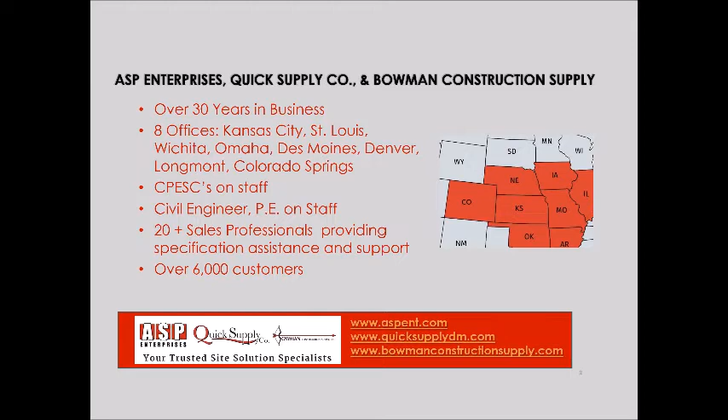We have over 8,000 customers now. I need to update my slide. But for those of you that only know us from phone and emails and meeting us at organizations and conferences, if you haven't had the chance to visit us, some of our locations have very impressive showrooms.

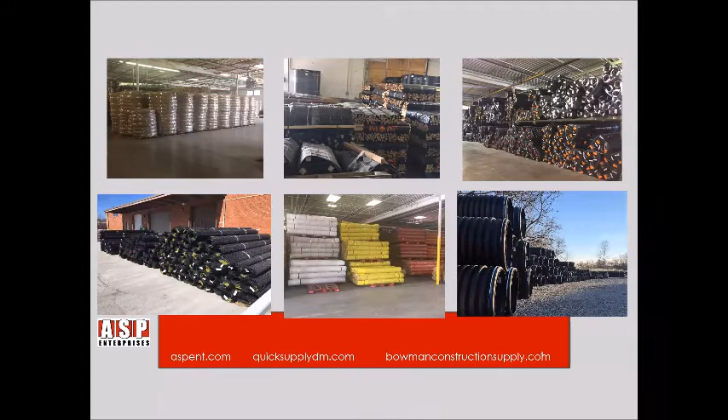Some have very impressive displays outdoors. All of our locations have warehouses and trucks and drivers, and we have the ability to quickly load up whatever you order from us and get it to your construction site. And we are still active in all of our branches and all of our locations. And some of our warehouses would blow you away with how full they are of products and materials, so you're not having to wait and have delays.

And we also have some very nice stock yards at some of our facilities where we can supply a variety of different materials, not just the erosion and sediment control materials I talked about, but also drainage products, vegetated solutions, engineered products, hardscapes. And we're blessed to be partnered with a lot of the top manufacturers in the world.

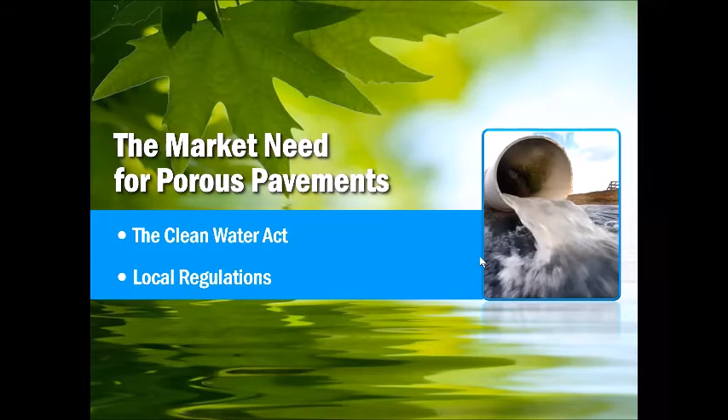So the natural first question is, why are porous pavements needed, and how are they going to be different than a standard pavement surface that we would typically see? So porous pavements are a class of solutions that address in a cost-effective way regulations that may need to be met.

After 40 plus years, the Clean Water Act continues to create the need for stormwater management for both quantity and quality. And most states have developed non-point pollution regulations with specific targets. Local regulations may require even more stringent standards if a project is located near a protected wetland or water source. And porous pavements are going to be one great way to meet all of these criteria while still performing in a structurally meaningful and long-lasting way.

And another reason that you may choose porous pavements is because you want to. Poor soil conditions are becoming more common as better suited sites are more scarce and land is at a premium. High stormwater management value is going to be the desire to make the best use of valuable, high-cost land and reduce the need for stormwater ponds by increasing the porosity of your pavements.

Porous pavement systems handle the water at the point of impact, percolating the water where it falls, and avoiding the need for additional conveyance pipes or structures that might otherwise be necessary. And sustainable solutions are popular with the public nowadays because of the high percentage of recycled materials, reduced landfilling of those abundant recycled materials, and the ability to achieve green energy credits.

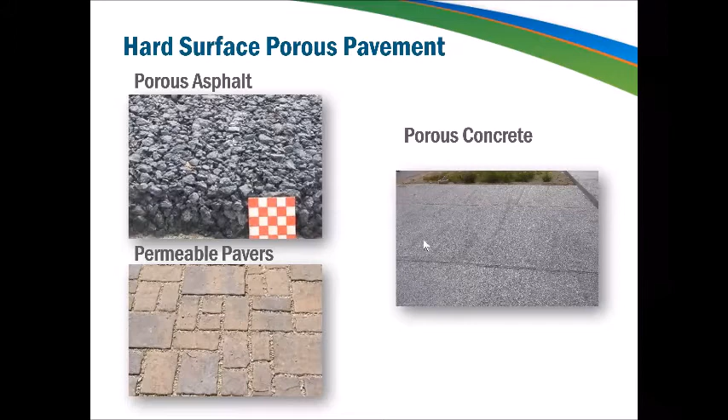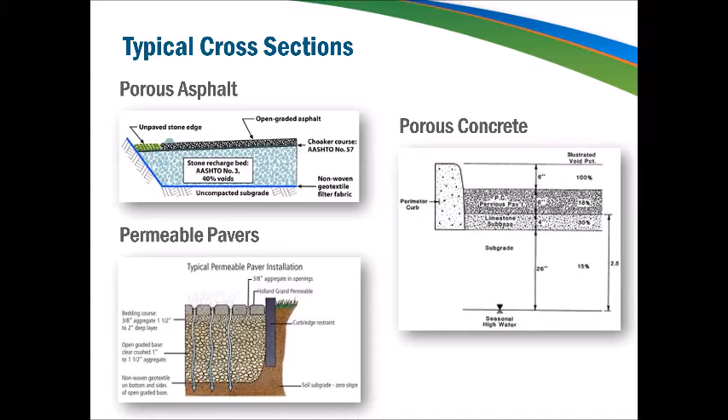So the biggest difference between the standard and a porous version of these types of surfaces is going to be the cross section. All three of these methods have deeper cross sections and require a choker or a bedding course between your pavement layer and the open graded base layer underneath. So this is going to be an extra installation step that requires additional time and adds costs, as well as needing extra materials to create.

However, there are some significant drawbacks in addition to that cross-section depth to using these more traditional porous methods. Cost is going to be the biggest factor, both during installation, because you need specialized materials to create these type of pavements, and you need specialty contractors who know how to properly install them, and higher cost over the lifetime of the system because you're going to need a lot more maintenance.

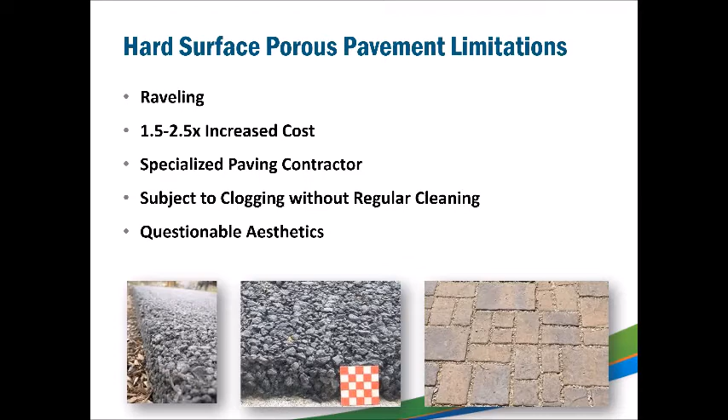Regular deep cleaning is going to be required to reduce clogged areas, as is resurfacing or replacement of lost material due to raveling. And that occurs because there's weak bonds within these materials, which is what makes them porous, but also what makes them fall apart. And in general, pervious concrete and asphalt surfaces tend to look unfinished, leading to some questionable aesthetics.

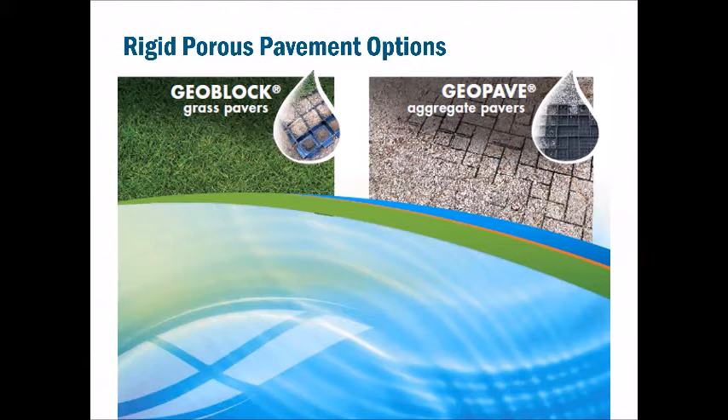So here at Presto Geosystems, we offer two different types of porous pavement systems, a flexible and a rigid system. And instead of adaptations of existing pavements, our solutions are designed from the ground up to function as porous pavements. So we're going to start with discussing the rigid porous pavements.

One option is going to be to create a vegetated porous pavement with a grass surface. It's meant for occasional or infrequent traffic, and it delivers the aesthetic of a green space. Local vegetation can be used to create a seamless look with your existing plants. And a unique blend of topsoil and clean aggregate is used as the base layer, allowing for root growth while providing necessary stabilizing strength.

Our other option for rigid systems is going to be an aggregate surface porous pavement. This system can handle higher traffic frequency, including daily use. And a confined aggregate can perform as an on-site stormwater detention basin, reducing or maybe even eliminating the need for conveyance pipes or other stormwater infrastructure. The structural strength and loading capabilities of these systems are going to depend on what your subgrade material is, which one of the infill types you choose, and whether or not you have a base layer.

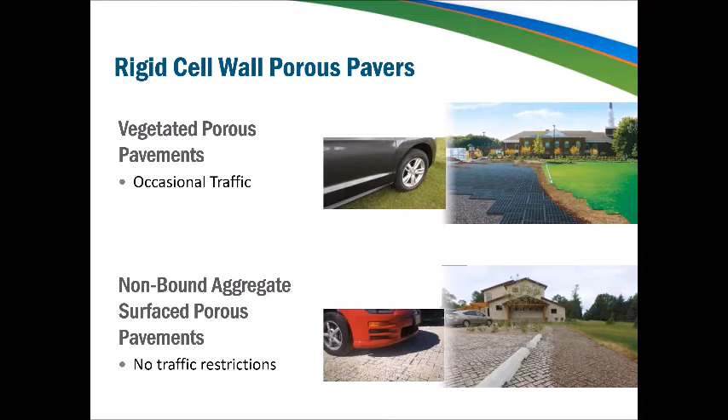So these are some of the important characteristics that are inherent to the GeoBlock vegetated system. The GeoBlock is a rigid porous paver unit, meaning that the panels are not meant to bend or twist. And this rigid nature means that a thinner cross-section is going to be possible and is a stronger system compared to systems that are made of geotextiles, which are also on the market. We're going to talk a little bit more about those as we go along.

And so this is going to be quite different than other porous pavement units that are available, which are considered flexible systems like the Geo Web and have significantly reduced loading capabilities. The attributes that have the biggest impact on the load distribution are the paver's wall strength and stiffness and a strong tabular connection.

An important aspect of the GeoBlock vegetated units is their large amount of open space in the bottom of each cell, which allows for full root penetration, so the grass is thick and uniform. And that mix of aggregate and topsoil we call engineered base, and it provides an optimal growing medium for that vegetation.

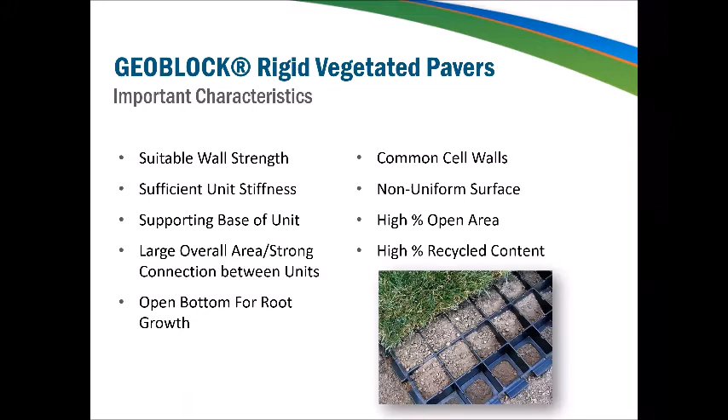So the GeoPave aggregate surface units are going to be really similar to the GeoBlock units we just saw, with the same rigid paver characteristics, but with specific features needed for the performance of an aggregate infill. And the main difference I want to highlight is going to be the monolithic mesh bottom. So rather than the large open space that we just saw in GeoBlock, this is a mesh on the bottom of the GeoPave units. So it's molded in place on the underside of the unit, and it helps keep the stone infill from migrating underneath the system.

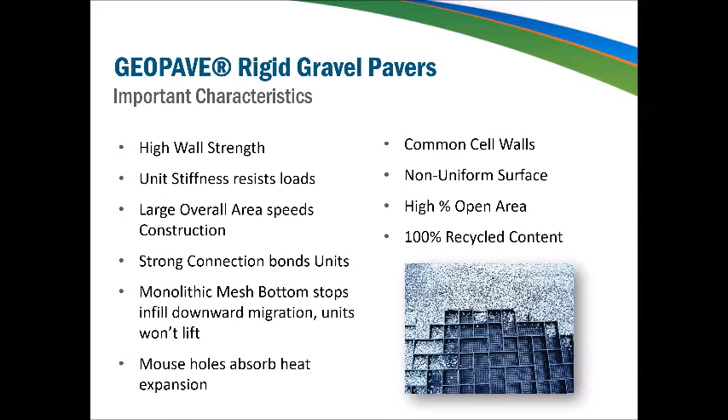And it also is part of the integrated nature and assists in the overall rigidity of the paver unit. And this bottom spreads the load similar to a snowshoe effect, so that the wheels aren't going to create any ruts as they go over. And the GeoPave units are locked together with a strong connection device, and so they can create a fully integrated, contiguous pavement that's highly resistant to traffic stresses. And this system isn't going to lift up over time, which is common with geotextile-based porous pavements. It's going to stay in place so you don't have to do a lot of maintenance repair.

And so that was our rigid products. Now we're going to move on to our flexible product. We call it Geo Web. This is a geocell, which is a term you may have heard before. It's similar to a geogrid, but it has a defined depth, so it's a 3D product. And flexible porous pavements can support the same loads as the rigid pavers that we just saw, but typically they're going to require a slightly deeper cross section to carry those heavier loads. But the flexible nature is beneficial if you know that your area has potential for settlement, such as across wetland areas.

So the Geo Web system is that 3D cellular confinement system, meaning that the Geo Web panels have individual cells that are filled with a material that ultimately makes up the final surface of your road or parking area. And by confining this infill material, the system distributes the loads and prevents ruts. And those cells also keep that material in place so that it's not going to wash away during a stormwater event. And the surface of the porous pavement is going to be stable no matter what infill is chosen. And it's going to need very little maintenance.

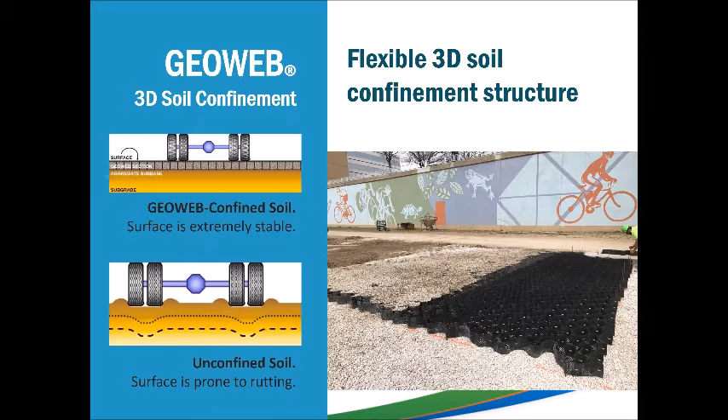So in this case, with the flexible porous pavement systems, you're driving on your infill material rather than the plastic paver units that you would with the rigid system. So that's going to be the biggest difference.

So the Geo Web system has two main attributes that we need to highlight. And the first is going to be that cell or container size. It comes in 3 diameters, small, medium, and large, and a couple different cell heights ranging from 3 all the way up to 12 inches. And knowing the project dimensions is going to help you determine which one is going to be right for you.

And because it's a flexible system, the seam where all of those connecting points are is going to be very important to the function of how the Geo Web system works. The stronger the seam, the better the performance of the Geo Web or any geocell system. And a strong seam allows for heavier infill material and better lifetime performance. And the strength of the panel material also is going to be critical to the performance of a geocell system like the Geo Web.

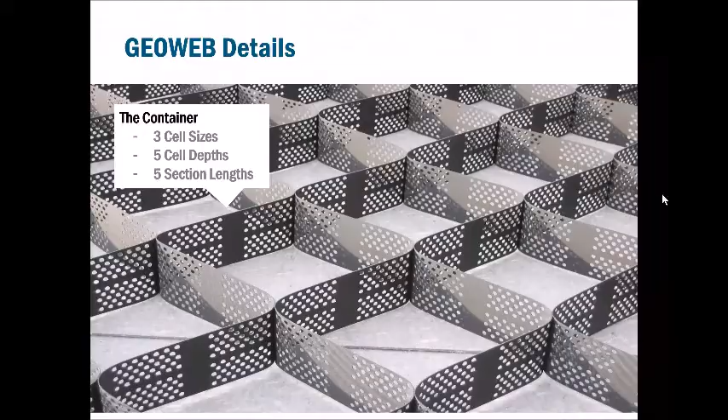And an important benefit to using this type of system is that you can use low quality aggregate and even salvaged materials on site to use as your infill. And using salvaged aggregate can save a significant amount of money on material and hauling costs if you don't need to truck in expensive engineered stone.

And when you eliminate the fines within the material, that provides confinement and aids in compaction of these cohesionless soils. Without fines, you can significantly improve the drainage and let water flow freely through the system, preventing pore pressure buildup and global failure. So that's how it acts as that porous pavement system.

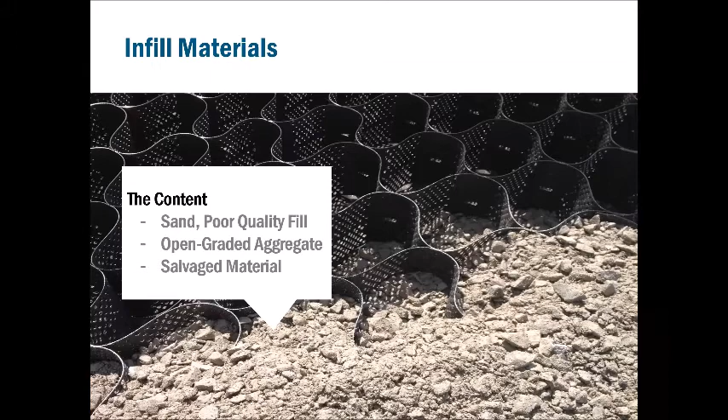And it's easy to see how a rigid porous pavement system would work to support your loads. A little more difficult to see how a flexible system would work. So the question is, does it actually work? And the answer is yes.

You can see the comparison within a truck yard here, with the GEOWEB system on the left and without it on the right. This is with a single pass of one of those fully loaded semi-trucks. Fully loaded, it's going to have this huge difference. Imagine on the right how often you're going to need to replace that system to keep it running in shape.

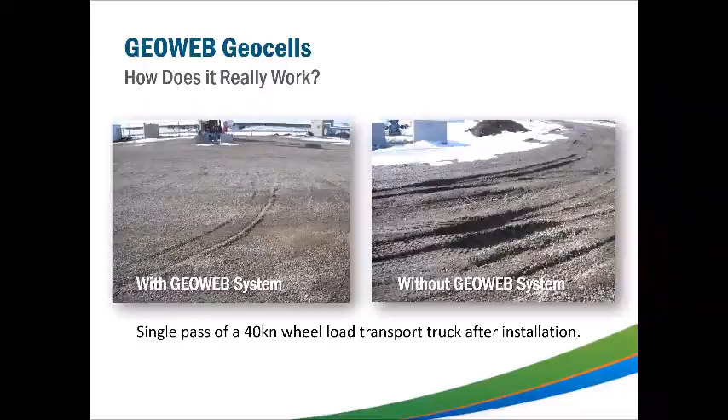So with that, we've now talked about the characteristics that make both rigid and flexible porous pavement units special. And with that in mind, we're now going to talk about the benefits of choosing a porous pavement over a hard surface that is impervious.

So all of our products offer significant storage of stormwater in the cross-section as it moves into the groundwater system. And because the water infiltrates right through the system, you're going to have minimal sheet runoff at the surface, reducing flooding potential on and around your pavement.

Both the Geo Web and Geo Pave systems have a high percentage of open area and utilize a highly permeable, open graded aggregate infill, so the stormwater infiltrates exceptionally fast. And then the loose and protected topsoil infill in the Geo Block units allows water to infiltrate faster than a typical vegetated area on site.

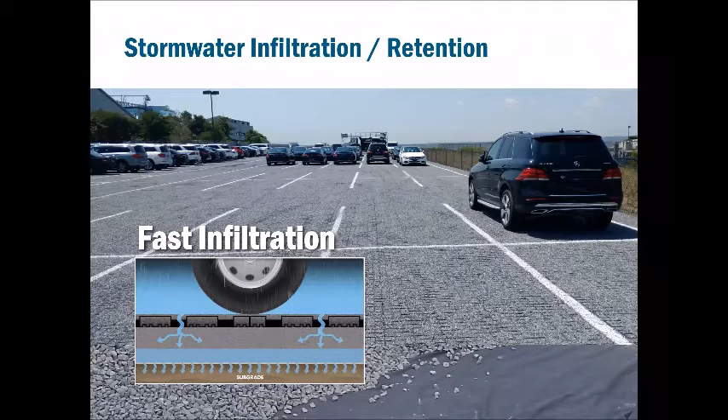Other paver systems on the market are geotextile fabric based, and so they're going to percolate much more slowly, which is going to defeat the purpose of a porous pavement. Pavements that allow water to flow through the surface and into your open graded base course can reduce the amount of requirements for stormwater storage at the surface.

And the rate of infiltration of all of our porous pavement materials is also going to depend on what your subgrade material is. A clay is going to infiltrate much slower than a sand. So that's going to determine if you do need additional stormwater storage at the surface, or if you can have all of that storage happen within your porous pavement system.

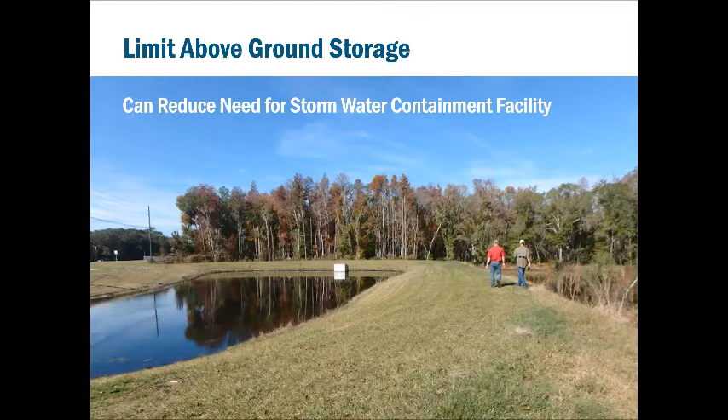So if your native subgrade has that poor infiltration, if it's a really wet clay, or maybe you are required to direct your water to a central location, collection pipes can be installed in your open graded base course. And the pipes should have perforations to collect that water and then be sloped to maintain velocity. And all of that can happen without affecting your surface grade.

Providing that wrapped perforated pipe is typically not recommended unless your base is clean. Otherwise, it can become clogged. It's usually better to provide a geotextile filter around the perimeter of a drainage trench or a French drain so that the pipe is encapsulated within stone.

The main thought is you do want to prevent that clogging, and the method that you use will be based on what you have on site, what type of stone is available. But you can have a nice flat parking lot and still collect your stormwater with ease.

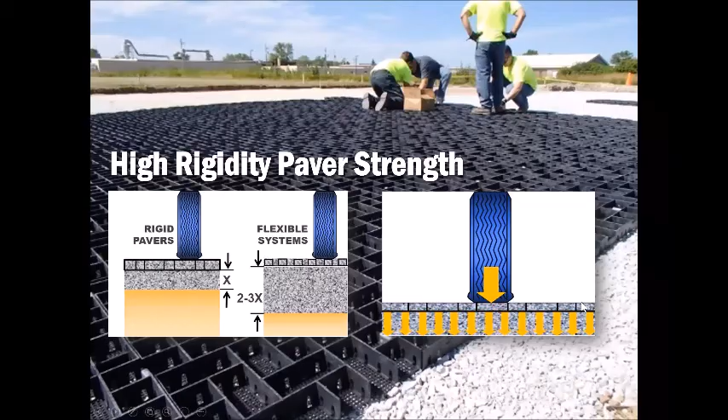So our Geo Block and Geo Pave rigid pavers do have a really high crush strength because of their rigid and shared wall connections. Pavers with enough strength allow for less base requirements to support the load, reducing your potential cross-section by up to 67%. And the surface of your porous pavement resists concentrated rutting as the load is dispersed across the rigid paver units. So there's no wheel ruts and no sunken drive lanes.

And so you're not going to get any of those normal failure points that you would see with a standard pavement. And the units are strong enough to drive on when they're unfilled, which makes installation both faster and easier. So if a thin cross section is what you need on your site, one of these products is going to be the way you want to go.

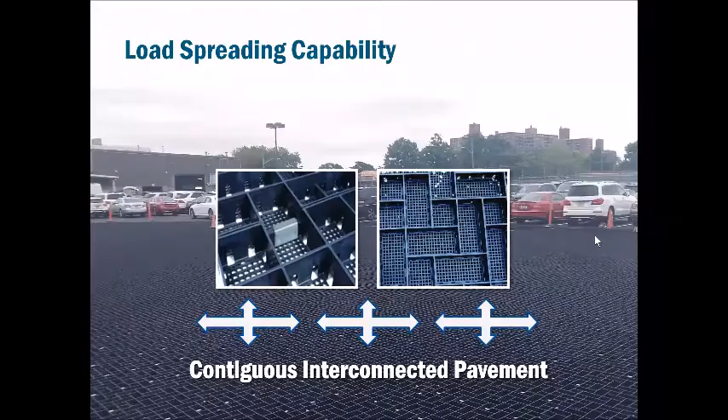Both the rigid and flexible porous pavement options can cover a large area as a single contiguous system. The integrated system supports each unit with strong connectors, common cell walls, and everything else to create that contiguous pavement with a high distribution of vehicle loads. It allows for higher vehicle weights to drive on the system with a thinner cross section, and allows the system to be installed over poor subgrades, even very poor subgrades like wetlands.

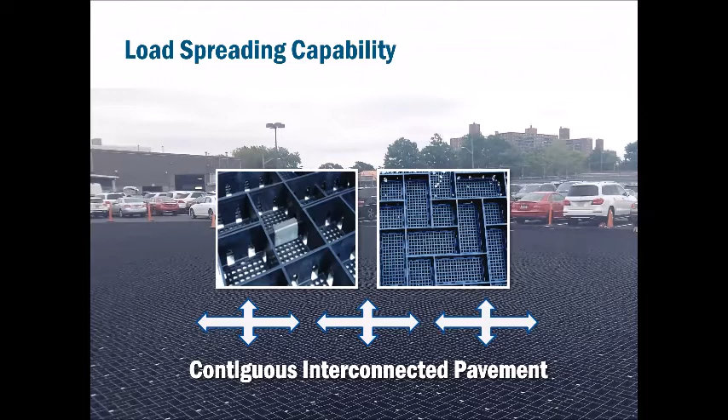The geotextile fabric-based systems don't share any of those cell walls or connector points, so they're going to warp under vehicle loads, and they just don't have that same load spreading capability.

Speaking of load spreading, one of the functions of a porous pavement system is to reduce the stress that's transferred to the soil by vehicle traffic.

A great application of these products is to use them as tree root protection. By laying these systems over tree roots, as close to the tree trunks as possible, you reduce the stress that puts pressure on those roots and could potentially damage them, which would result in killing that tree. So if you have trees that need to stay in place, all of our systems are a great way to get your vehicle access roads, like a driveway, which uses any of those systems to create a stone or vegetated surface while keeping that existing vegetation in place.

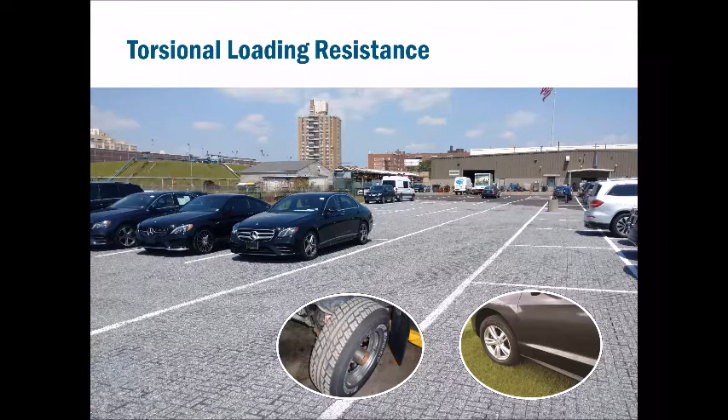With the rigid system, that shared wall system and strong connectors creates a framework that's highly resistant to movement or breakage from vehicle turning stresses, so your torsional loads. Both the GeoPave and GeoBlock systems aren't just for straight drive lanes, they're full service vehicle areas, allowing for starting, stopping, turning, and everything in between. The panels aren't going to become damaged from any normal vehicle activities, even the heaviest trucks or semis.

Both the rigid and flexible paver units align well with existing asphalt or traditional pavements. Here you can see a car dealership parking lot addition. The paver units come in rectangles, but they can all be field cut to handle curves, existing structures such as manholes, or other obstacles that are common on site.

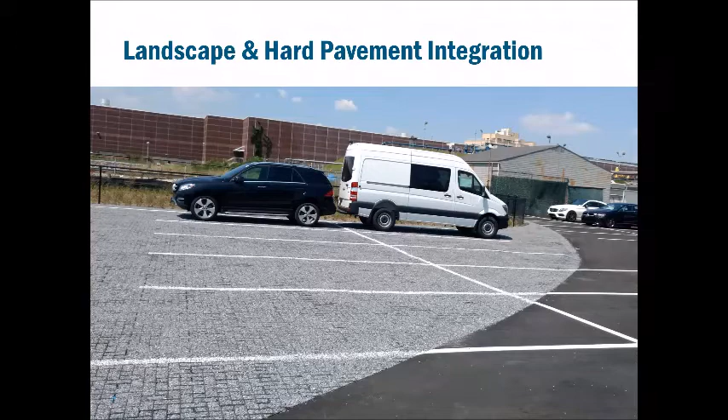The GeoPave and GeoBlock units, or the Geo Web panels, can work in concert with a hard surface pavement, and they're so porous they can actually handle the sheet runoff from adjacent impervious parking areas. This is a great way to add additional parking spaces while still meeting stormwater requirements on site, with no need to create additional stormwater infrastructure such as drainage swales or ponds.

The cell walls of the GeoPave unit are meant to be visible, so they were designed with the herringbone pattern, similar to a paver stone aesthetic. Additionally, the stone color can be varied to create a sense of separation, useful for walkways, parking lots, and road shoulders.

The GeoBlock units allow for full vegetation growth with a natural look, so you're not going to see the cell walls, just a nice green lawn. The Geo Web panels are actually going to be completely covered by any stone that you use, so an aggregate surface is all that you're going to see. Whatever look you're going for on site, you can achieve it with one of these products without that unfinished look that's really common with porous concrete or asphalt.

Reducing a site's overall environmental impact can help you meet green infrastructure, low impact development, or green building goals for building in protected or densely populated areas. It can also help you meet stormwater requirements that limit the amount of hard surface in your landscape plans, which is becoming an increasingly common requirement in cities and townships. This is something we've experienced all across the US and are absolutely willing to help you achieve for your specific projects.

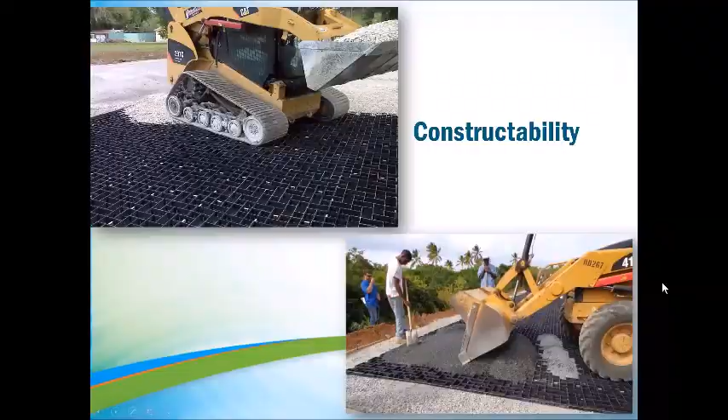There are a number of constructability benefits as well. All of the products are lightweight enough for a single person to carry at least one or two at a time, and the connectors are fast to install.

One of the great things about using the rigid system is that the infill placement is fast, as both tracked and rubber tired equipment can drive on the panels when they're unfilled. You can see that here in the photos. Paving crews and specialized paving equipment aren't necessary, and oftentimes landscaper crews are all that's going to be required for installation. So you can save on equipment and labor costs and get these systems in the ground quickly without waiting for cure times or sequenced construction limits.

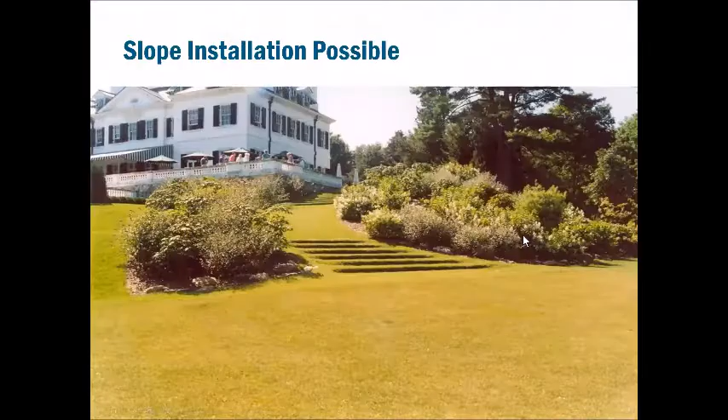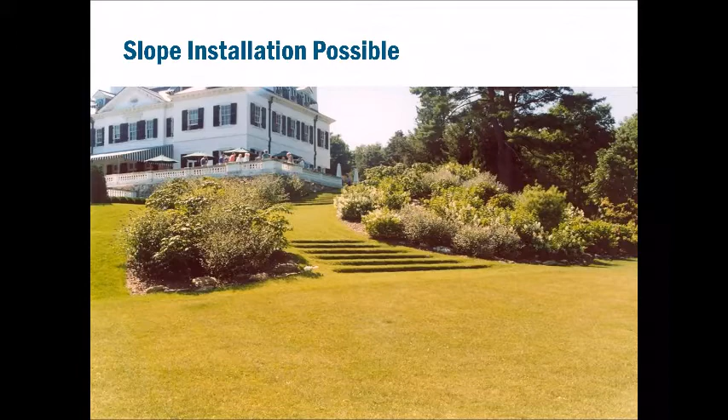And the rigid GeoPave and GeoBlock units work best on a mild grade. Because they're flat paver units, the slope does need to be quite gradual without any sharp breaks between those grade changes. But the GeoWeb flexible system is going to be a great option if you know that you have a slope. The GeoWeb panels can be placed on slopes as steep as 30 degrees and still allow for vehicle traffic.

The GeoWeb systems can also handle dips or hills more easily than the rigid system. So if you want to minimize your excavation and grading activities, that's okay. The flexible GeoWeb system is going to work great. So the locked in place system requires virtually no maintenance. Place it and forget it. Owners and maintenance crews are definitely going to appreciate this feature.

We have bright yellow delineators that are available for parking lines or other markings, so you can make the space work for your needs. And other common extras, such as parking stops, are also easy to install in any of our porous pavement units.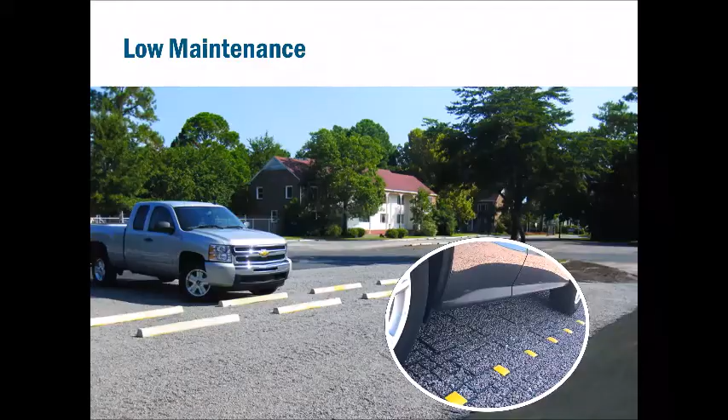So Presto Geosystems has a free, easy-to-use tool that can help you determine the right porous pavement system for your specific project and site conditions. A cross-section of the system is created based on your inputs and system requirements. And it's a way to determine exactly how deep the cross-section needs to be to retain a certain amount of stormwater storage. The tool is available on our website, prestogeo.com, and our engineering team, including myself, is always happy to help give advice or expertise on designing one of these systems.

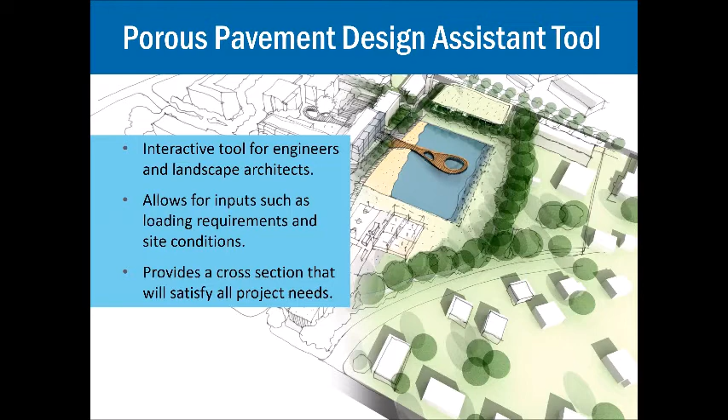So this is a quick look at what the Design Assistant tool provides you. It's a pretty basic cross-section, but it can be pretty helpful during the beginning of the design process. And if needed, additional calculations and CAD details, the engineering team here can provide those. But this tool is going to be a good first step when talking to regulators to show that there is stormwater storage available in this type of system.

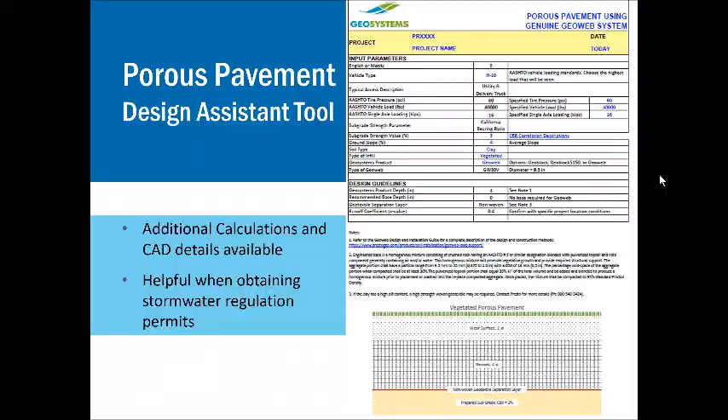So now, didn't click. There we go. So now we're going to take another quick look at the flexible GeoWeb System. We've talked about it a bit so far, comparing it to our rigid pavers, but it's also going to be a good option for pervious pavements in challenging site conditions, such as wetlands or along hills.

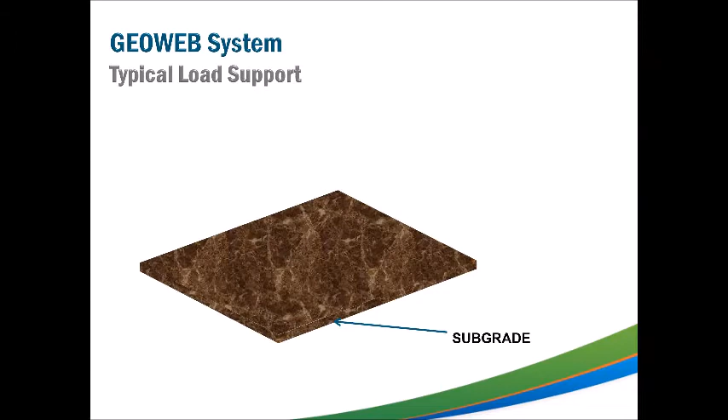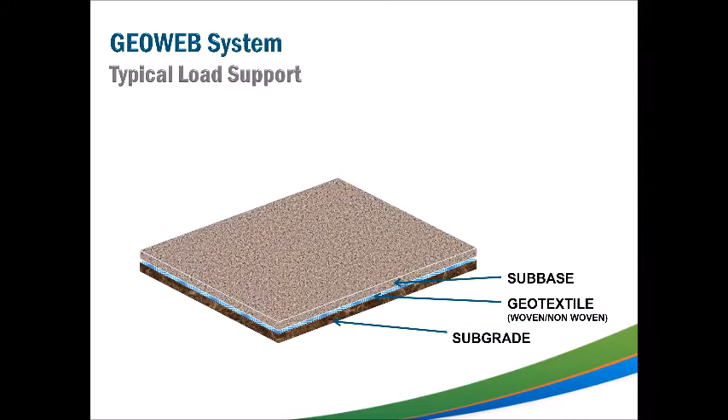So this is going to be our typical cross-section. You start with the subgrade of whatever strength you need, typically expressed as the California bearing ratio. And then we decide whether or not you need a geotextile, typically woven or non-woven, and it's going to depend on your system application which one is going to be appropriate. A subbase layer of aggregate may be needed if the subgrade soil is very poor, or if you have incredibly high loads that are going to be applied.

Then the GeoWeb material is going to be laid down, and then you fill it in with your desired infill material, stone or salvaged material on site. And you do want to have a slight overfill so that you completely cover the GeoWeb panels so the plastic is not visible. And it's important to realize that you need all of these components working together to support the load with a flexible system.

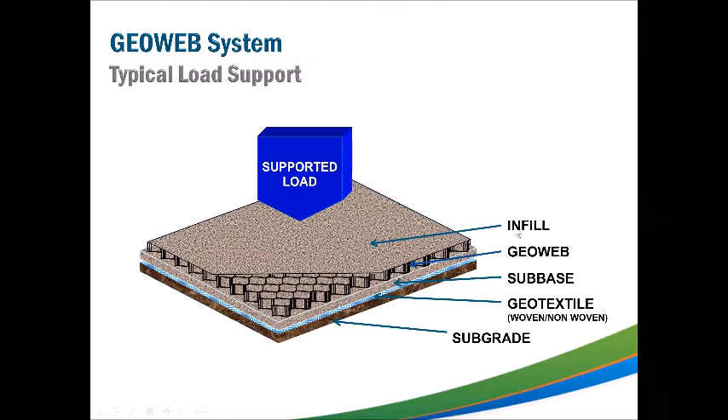So we're going to do a quick case study with a few photos walking through a marshland area. Oh, sorry, I'm not clicking through. So quick case study.

Sam, one of the challenges is on some of those slides, you'll click it, but it takes a 6 or 7 or 8 second delay sometimes. Sorry for that. You're doing great, by the way. Thank you. I'm trying to run through so that we have enough time for questions at the end. But you're doing awesome. Thanks. I'll make sure that everybody's looking at the slide I think that they're looking at. Sometimes you got to go back.

I get it. So this community came together to install a walking trail through a really marshy area, doing everything themselves, so no contractors. And so that shows how easy it is to install the system, especially when you don't actually have a lot of expertise in this type of installation. And because this was a marsh area, not interrupting the water flow of the surrounding environment was critical.

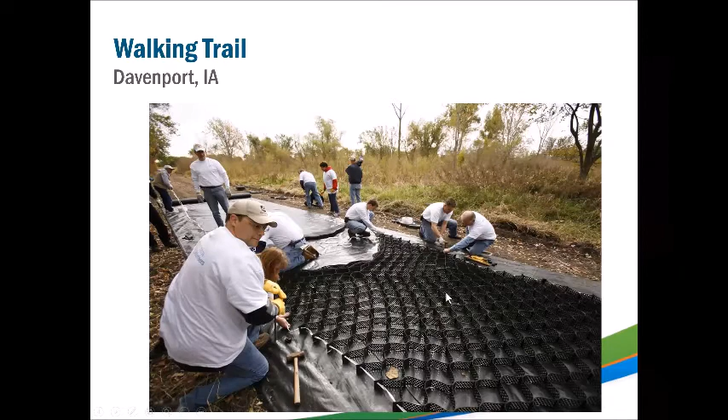So the GeoWeb panels are going to be filled in with stone. So that allows that water to flow through and then down into your marsh without creating any runoff or non-infiltration areas like an asphalt road would have. And this way, the impact of the trail on the natural environment is actually minimized, and people can still get a clean, stable area for their recreational uses.

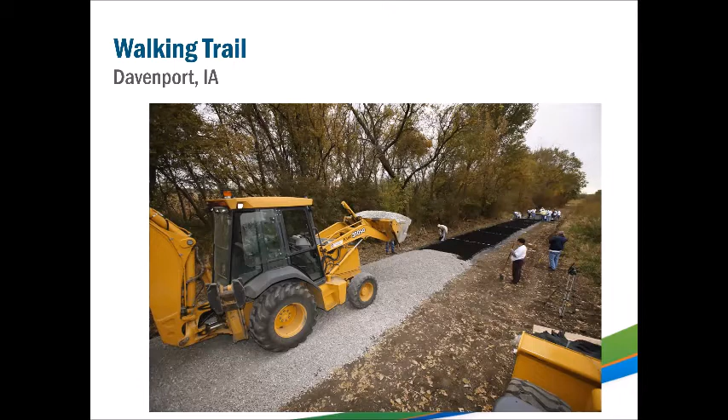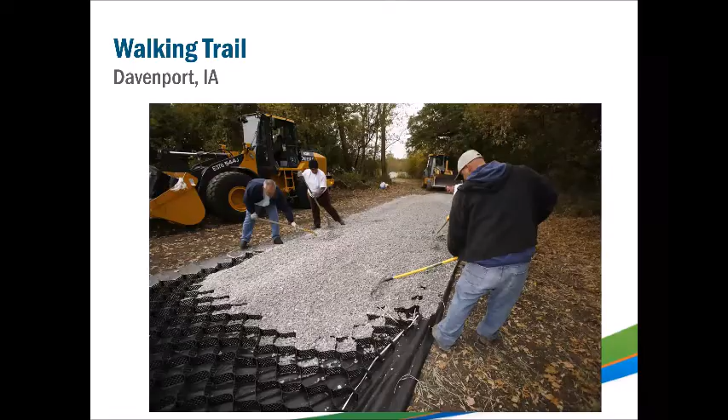It's going to be easy to use either machinery or manual labor to fill in the GeoWeb cells, same with both the GeoBlock and GeoPave systems. The overall depth of your cross-section is going to be variable with the GeoWeb system, since the panel comes in different depths, and it may need a base layer of aggregate if you expect a heavier load. The GeoWeb system usually requires the most excavation of any of our products, so that's something to keep in mind when choosing which product is right for your project site.

Another option is to do a livestock watering pad. Cows and other animals can really dig up a soil space, and even if you cover it up with aggregate, they'll dig that up too. You can install the GeoWeb system over the area, right in front of where they collect their water and feed, so it's maintained better. You don't have to keep coming back to add more stone, while it stays safe for their hooves so they're not damaging their feet.

Can I jump in on that as well? Absolutely. I love what you said about the Davenport walking trail, all done by volunteers, no contractors.

This one was done by a friend of mine in Southern Iowa, an employee of NRCS, who used this for the Iowa Cattlemen's Association. We had a really wet spring in 2019, and he had cows getting stuck in mud that was soft, more than 2 feet deep. Cows were getting stuck to their bellies, which was dangerous for them and for the mama cows, who were getting muddy, unhealthy, and spreading disease to the babies. So this was really important to get done, and it was all done by volunteers.

This was just a landowner who called my bluff when I said I have construction experience and like to do pre-cons to make sure things get installed right. At a presentation in front of mutual friends, he asked me to help him do this, so I did, with an audience of 120 people when it was first built. He's since sent me pictures a year later, and it still looks fantastic—all the rock in place, no settling, no rutting. Just as you said, it's great for load support.

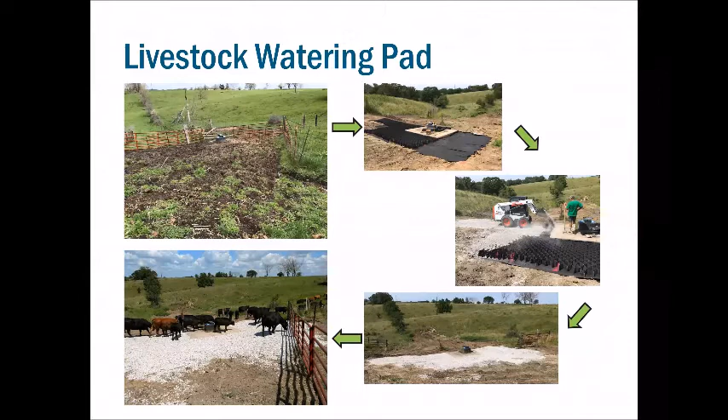So that's the GeoWeb system—it's the flexible, porous pavement. It's got some challenges in the design you need to do, but it has some really good application types, so it is a great option. Moving on to the other option we had, the rigid porous pavement.

We're going to start with the GeoPave, which is the aggregate surface. Here's a typical cross-section of the GeoPave system. It's 2 inches deep, so the overall depth of the system depends on if you need an open graded aggregate base course. There are a variety of factors that decide if you need that base course and how deep it is, but if you do need it, your cross-section is going to be slightly deeper.

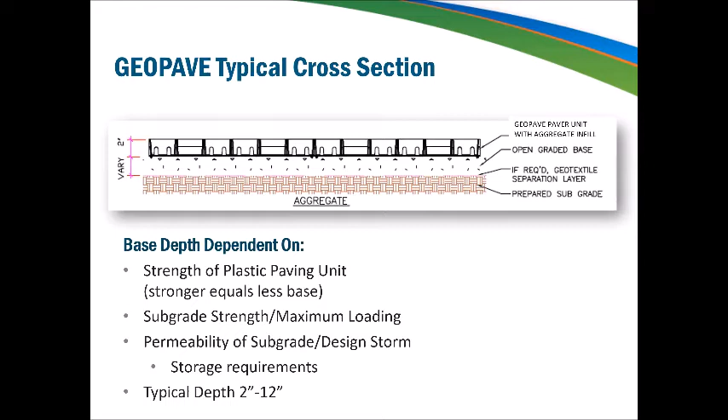Depending on your native subgrade soil, a geotextile separation layer may be required. Note that there's no need for a choker or bedding course underneath any of these units, which you saw with the porous concrete and porous asphalt systems. So there's no layer that limits the amount of stormwater infiltration into the system, meaning you won't get ponding at the surface because it can't infiltrate fast enough.

The biggest factor in determining the base depth is the strength of the soil, expressed as the California bearing ratio—the higher the ratio, the stronger the soil. The strength of the GeoPave system is such that even up to the highest load rating, AASHTO H20, H25, which are heavy, fully loaded fire trucks, there's a low base depth requirement.

Only 6 inches, as compared to up to 14 or 18 inches, even with a geotextile fabric-based system. It's important to note that this table only shows the minimum depth requirements. The base can be increased if you want additional stormwater storage or if a certain amount of storage is required.

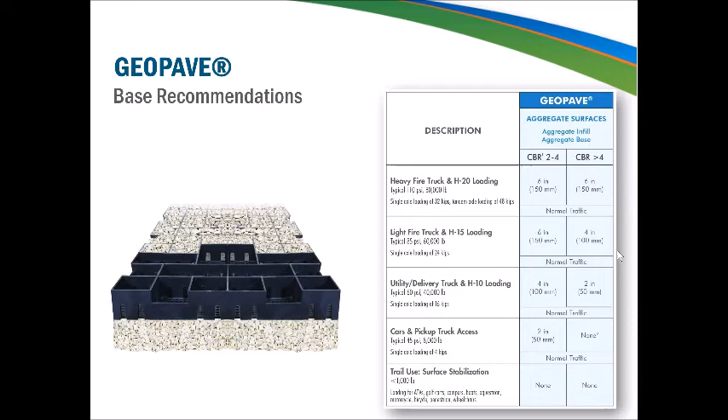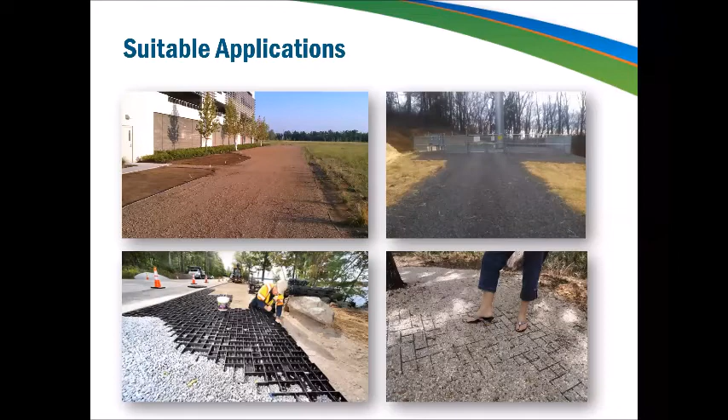There are a wide variety of uses for the GeoPave system, including fire and utility lanes, site access roads, road shoulders for runoff reduction, and trails or walkways. It's important to note that they are ADA compliant once filled in with stone, so everybody can use these types of systems.

Unlike the GeoPave unit, which are rigid paver structures, geotextile-based paver systems, or what we typically call rolled systems, because they come rolled up like a fabric, can have some problems because they don't have those common shared cell walls we've talked about. They allow the stone infill to get underneath the system, causing uplift and damage like you see here.

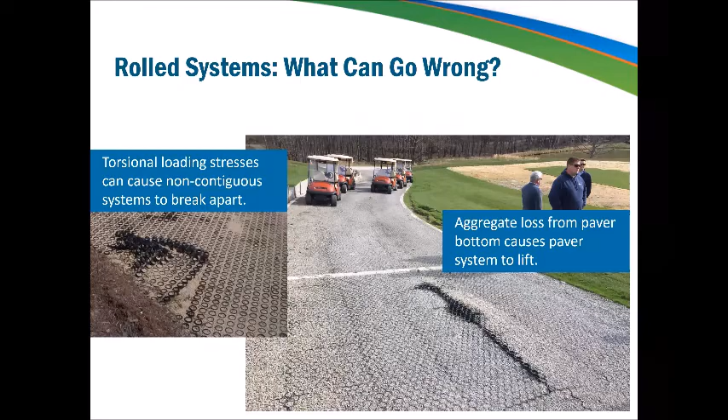The design of the GeoPave system, with its rigid shared walls and integrated mesh bottom, helps prevent these types of issues. We want to make you aware that just because a system says it allows stormwater infiltration doesn't mean it's actually appropriate for your site or project. You want something that's designed to work well.

I have a quick case study showing how the GeoPave system works from start to finish. This study was at the parking lot at the Citadel in South Carolina. You can see how close it is to a coastal area, which is similar to situations along inland lakes, stream beds, ponds, anywhere you have water flow.

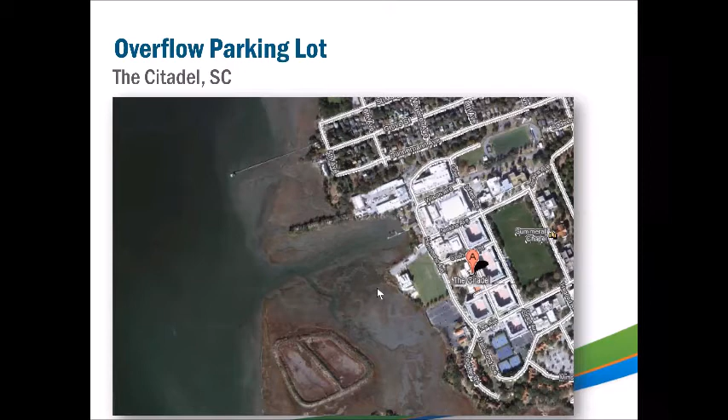This system was installed in the summer of 2009 and is still in place today—a good long lifetime, still going strong, with no instances where it may need to be removed. Because this project was primarily about stormwater retention rather than just supporting vehicle loads, the open graded base course was quite deep, 8 inches.

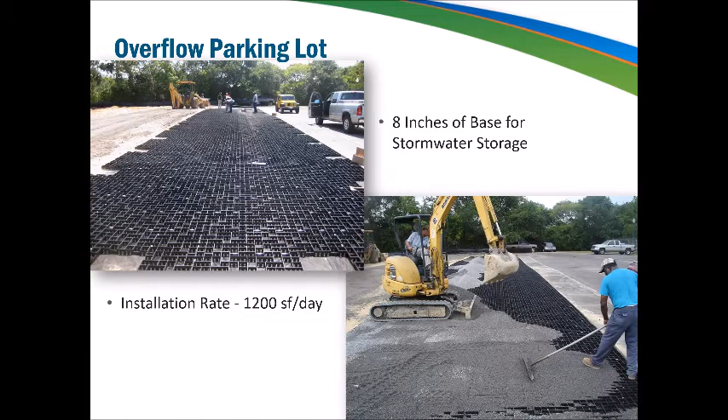Standard lightweight construction equipment was used with no need for specialty equipment. The crew, which had no prior experience installing the GeoPave system, was able to achieve an installation rate of 1,200 square feet a day, including excavation and filling in the panels, both with equipment and by hand—a pretty good clip.

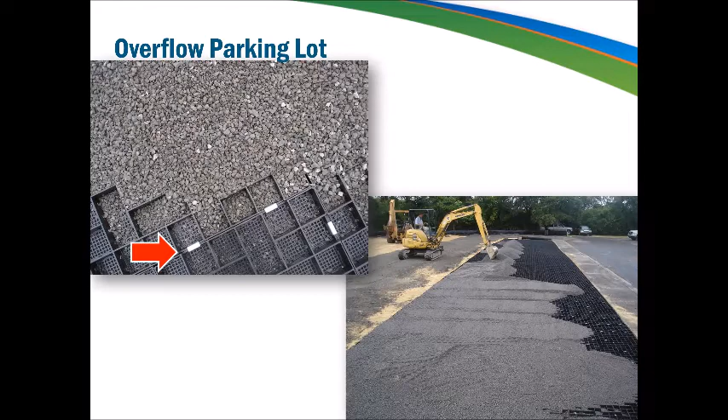The connectors are easy to install, and it's pretty apparent where they need to be placed. Some of the walls are half height, and those half height walls line up between different units, so contractors know exactly where these connectors need to be placed. The clips can be installed by a single worker without needing any electrical equipment—another cost savings. A small excavator or front end loader is a great option for placing the stone infill.

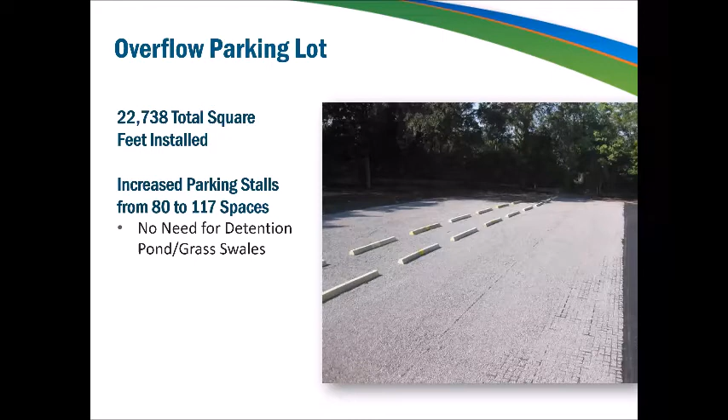Here's the parking lot right after construction is finished. Because the stormwater retention in the base was so deep, no additional surface detention ponds were required, which is great for areas without space to spare. If an above ground detention pond had been installed in this area, there wouldn't have been room for the additional parking spaces. So this was a great compromise between function and environmental concerns.

Here is the parking lot about 2 years after installation, still looking as good as the day it was placed—no maintenance was required over those 28 months in terms of replacing any units. We do have some recommended tips for keeping the GeoPave pavement in good shape, including keeping the lot clear of organics, such as fallen leaves, by raking or leaf blowing. When there's snow, make sure the snowplow blades are kept a little bit above the units so they're not in direct contact, which could potentially cause damage.

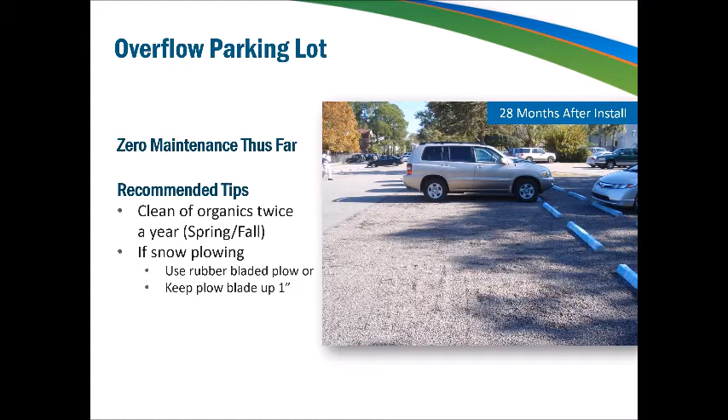I know that placing porous pavements in cold weather or snowy conditions is a concern for many regulators. So we have quite a bit of information available on our website answering a lot of the common questions we see, or contact us directly and we'd be more than happy to help alleviate any of those concerns you may have.

Now we're going to go with the vegetated system, which is again a rigid paver unit. We call it GeoBlock.

So again, there's the typical cross-section of the GeoBlock system. The panels themselves do come in 2 different depths, 1.2 or 2 inches. And the depth of the overall system could depend on whether or not you need that base layer. Topsoil or sod is going to be placed in the cells, and then the roots reach down into the base so that they have room to grow so they're not going to be starving at the surface.

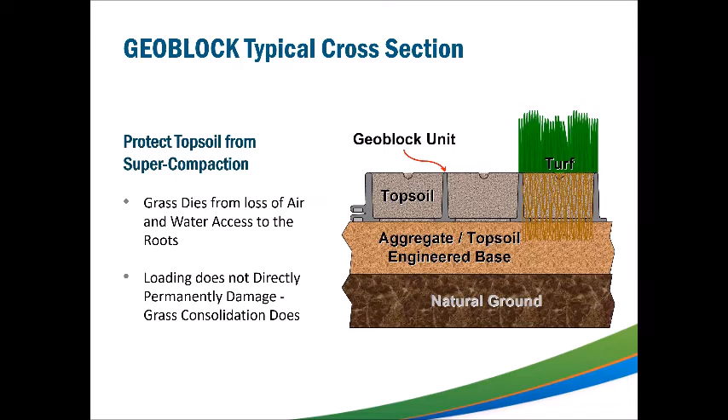And a base course is going to be that mix of topsoil and open graded aggregate, which allows the topsoil to promote root growth while the aggregate helps support your vehicle loads. We call it engineered base. And it's usually just a 2/3, 1/3 mix aggregate to topsoil. So pretty simple to create on your own.

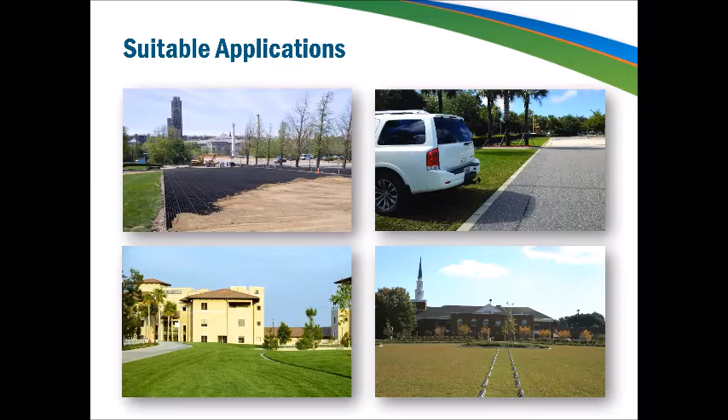And the uses for GeoBlock grass paver are going to be similar to what we've seen before. But you do want to keep in mind that grass pavements are meant for occasional use only. So fire and utility lanes, access roads, special event parking, or overflow parking for things like parks, churches, and stadiums are all good options. Basically, anywhere that you don't anticipate vehicle traffic loads every single day.

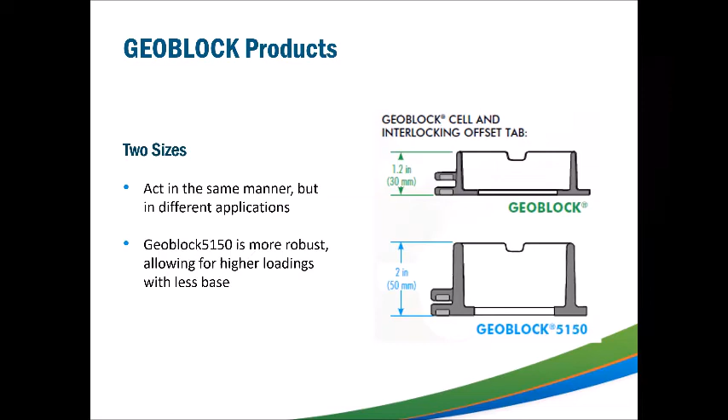So as I said, there are two different depths, and it allows for some flexibility of choice. If your expected loads are light, think cars or pickup trucks, you don't need to support as much as the roads that are going to be carrying fully loaded fire trucks. So the two products are very similar. They act the same way. They just have different depths. So we can help you decide which one is going to be more appropriate for your project.

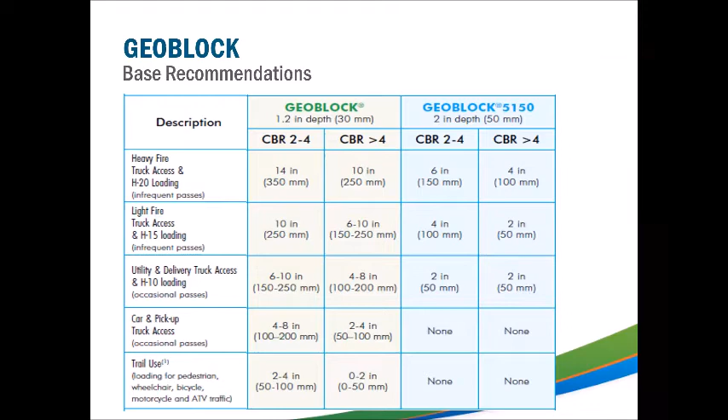And again, a table showing how deep your engineered base is going to need to be, helping you determine what your overall cross section is. So the thicker GeoBlock 5150 product, 2 inches deep, can have a thinner cross section than the smaller GeoBlock 1.2 inch panel. So if having shallow base depths is important, you may want to go with the deeper rigid paver unit. And again, these are only minimums. If you do want to have more stormwater storage, you can add more base.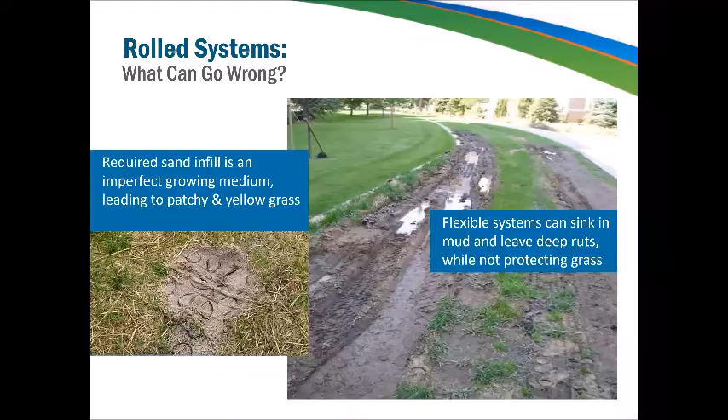So there are also the geotextile based porous pavements for vegetated surfaces as well, and they act even worse than the aggregate ones do. So the fabric systems tend to rut in areas of soft soil because they can warp due to vehicle loads. They're not actually supporting the load. They're just digging deeper in the soil with every pass. And these systems require the infill material to be sand, not topsoil. And it's not hard to imagine the difference in grass when it grows in sand, that sort of icky yellow straw-like color, versus the nutrient-rich topsoil, going to give you that nice green lawn.

So we do have some quick case studies for the GeoBlock system as well. So our first one is going to be at Green Tree Elementary School, which was done in St. Louis, Missouri. And they needed to create access lanes for emergency vehicles to the back of the buildings on their site while still maintaining a nice green lawn for the kids to play on. So the system was installed in the summer of 2003 and it's been in place for well over a decade and a half now. The ground was leveled off and the GeoBlock 5150, so the 2-inch deep panels, were placed.

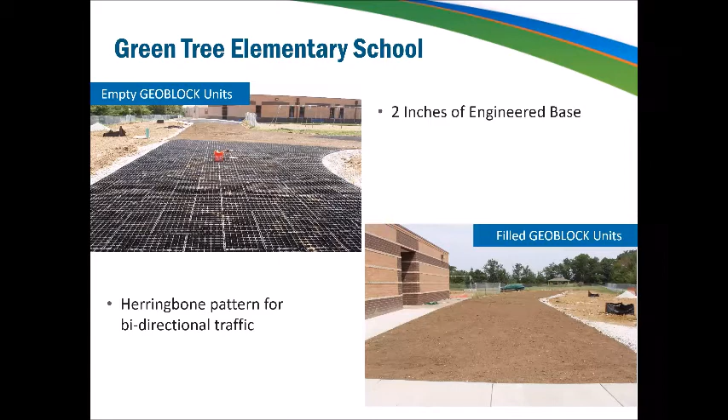And they were laid in a herringbone pattern, which is recommended for those areas that are going to have bi-directional traffic or lots of turning and movement, as is common in parking areas. The base was only 2 inches deep, which satisfied the requirements based on their expected vehicle loads. And then the cells were filled with a local topsoil and seeded. And local is good because that way you know the grass is going to grow.

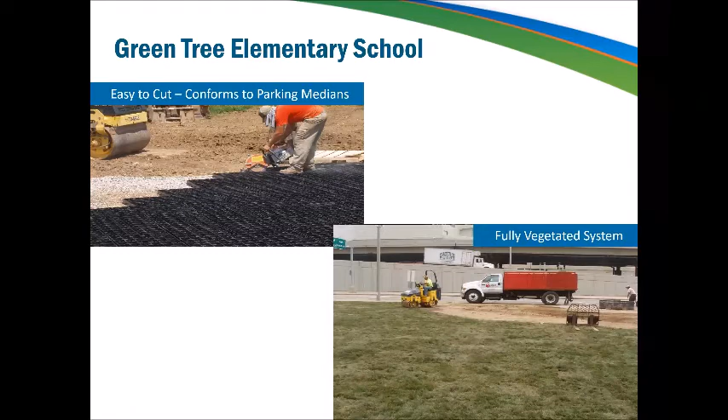And as we previously mentioned, it's easy to field cut the panels to accommodate curves or other obstacles so that the grass and the vehicle support go right up to the edge of your area if necessary. So there's not going to be any spaces that are lacking support. And once the grass grows in, it completely camouflages the panels. So it looks just like a normal lawn area.

And months after completion, the vegetation is fully in place and can be used for emergency or overflow parking situations. The lawn is still available for play, which the kids can enjoy, since it's a lot easier to avoid skinned knees on grass. And the maintenance of grass pavements is going to be similar to any grass surface. Your standard lawnmower is going to do the trick. So our last case study today, it's on the campus of Newman University in Wichita, Kansas.

So the campus needed to upgrade their emergency fire access lanes. And while the fire trucks were able to drive on the existing concrete sidewalks, local regulations required that the surrounding lawn area also be able to support those vehicles if necessary. So the GeoBlock units were installed along the sidewalks, effectively creating a mixed surface driveway with concrete sidewalks and then vegetated areas with the porous pavement.

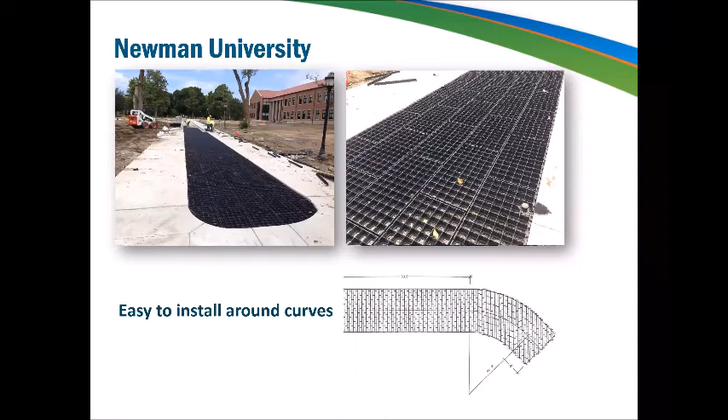The units were then filled in with topsoil and seeded. And the units, again, go right up to the edge of those concrete sidewalks. So they're constrained against movement, and there are going to be no areas that are unprotected. So there aren't going to be any areas where a vehicle tire may sink into the mud, and there's not going to be any scour of that soil. Again, the plastic is fully covered, so the average person isn't going to notice anything unusual about this area. The sidewalk area itself hasn't changed, but now the area is going to be accessible for emergency vehicles.

Bill, did you want to add anything about the rigid porous pavements before I wrap up here? I do. I really like the idea of reducing the impervious area, so it reduces the amount of stormwater detention that's required. But I also like the look of having this drive lane that doesn't have to be overpaved. We live in a lot of communities where, because of traffic flow and safety concerns for emergency vehicles, a lot of the public streets have gotten really, really wide in the last several years.

So I think any opportunity for private development to do low impact development like this is really a great benefit to the entire community, because a lot of cities that are doing green infrastructure still have to satisfy their traffic requirement first. So anything you can do as an alternative to paving an entire wide road through a campus or private property is excellent, not just for fire access lanes, but anywhere it can be used in commercial, residential, or office is great. And I don't have any other specific things to add about this project, but we have some great questions that will be available to answer here in a few minutes.

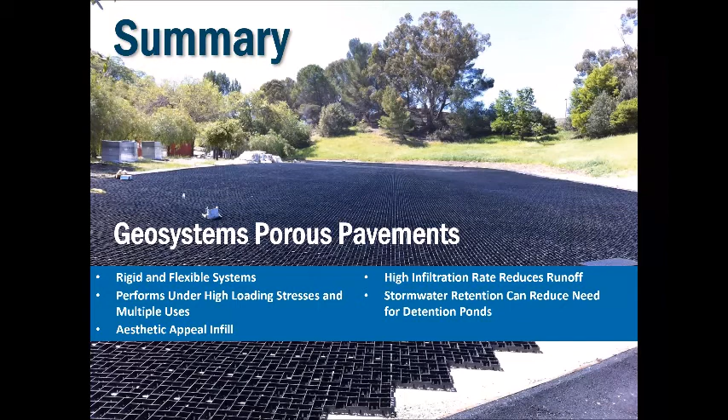So just to summarize, we covered the GeoPave, GeoBlock, and GeoWeb systems, so rigid and flexible porous pavement systems, and detailed some of the many advantages they have over traditional hard surface pavements. Benefits such as stormwater management, high vehicle load capabilities, and aesthetic aggregate or vegetated infill were just some of the great aspects of using one of these porous pavement systems.